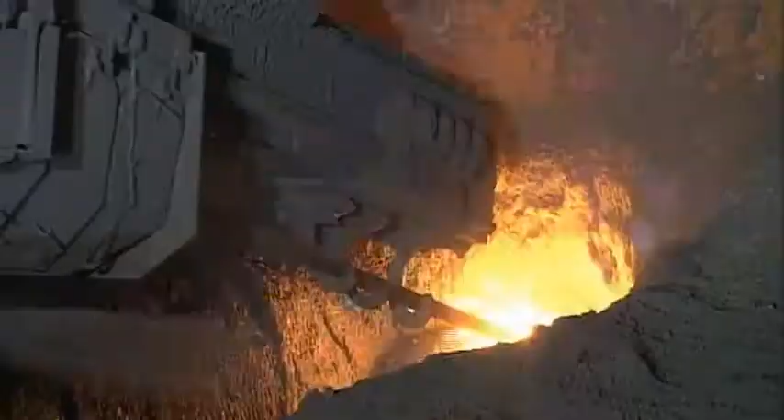JFE Group is one of the leading business groups in Japan, whose activities range from steel manufacturing to shipbuilding and to engineering and construction of industrial plants. JFE Group has 54,000 employees and 230 group companies. Its annual sales volume amounts to 32 billion euros.

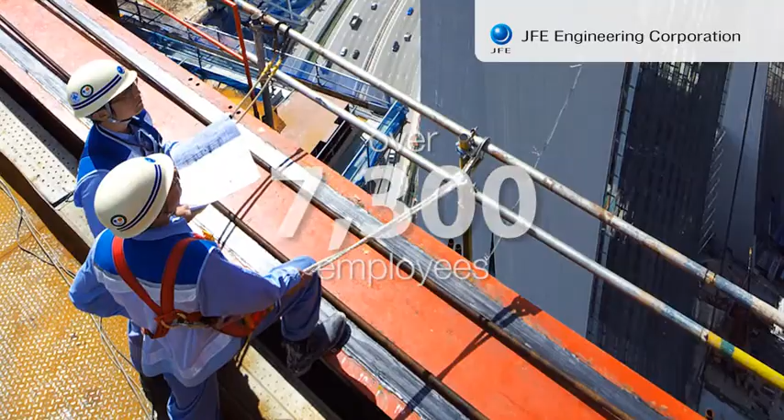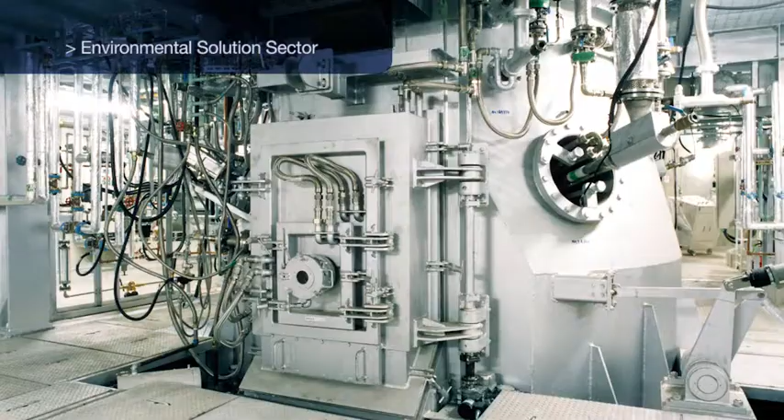JFE Engineering, with its 7,300 employees and sales of over 2.7 billion euros, is one of the main activities of the JFE Group. It operates through specific divisions in these fields: environmental solution, recycling, energy industries, steel structures, industrial machinery, and research.

Its engineering capability, extensive operational experiences, and a clear recognition of the changes in our society give the company a foresighted vision of the future.

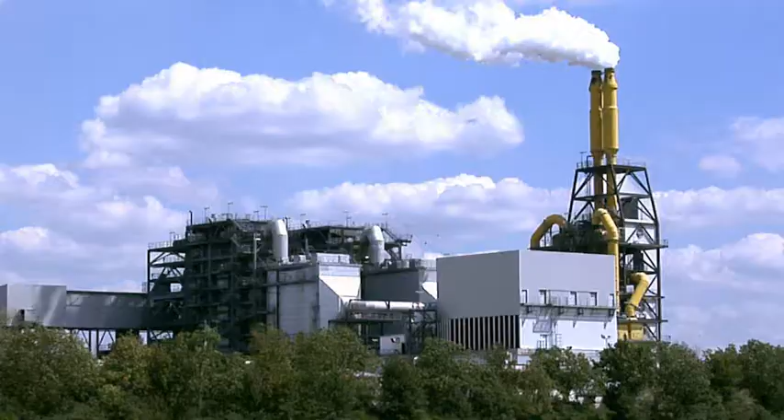JFE Engineering gives priority to combining its corporate growth with respect for the environment. Japan, as a densely populated country, has had to focus on environmental protection, which includes resolving waste disposal problems. Within this framework, JFE Engineering has been working for over 40 years to change waste into resource. From 1968 to the present day, JFE Engineering has designed and built over 150 thermal treatment plants, becoming one of the leading companies in the industry and contributing to Japan's success in its waste management strategy.

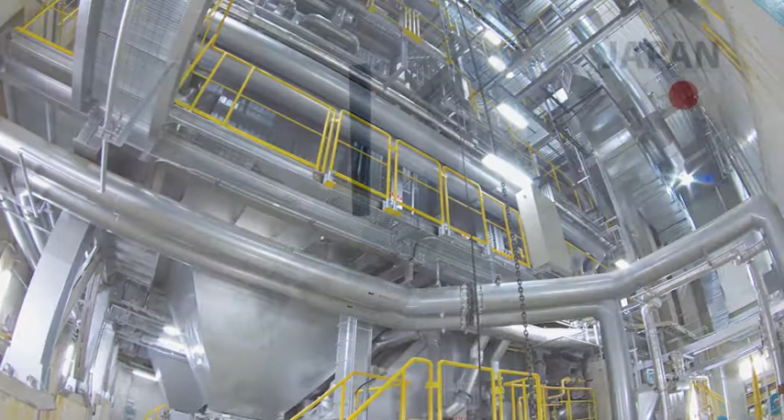Applying the technology, Japan has succeeded in drastic reduction in landfills, where now only 2% of the total waste is being directly landfilled. The growing awareness of environmental protection leads to the suppression of landfills and of the problems related to this kind of waste treatment.

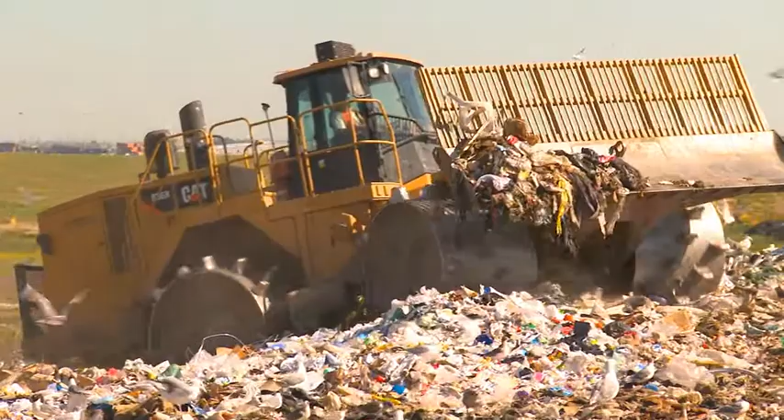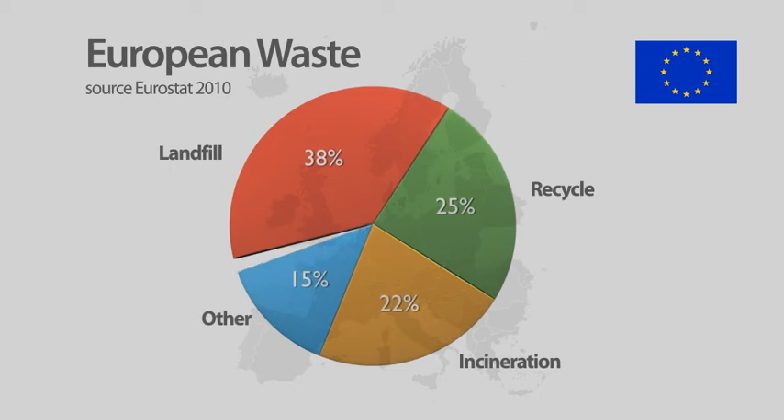In order to put an end to the era of landfills, the European Union has adopted a waste management strategy based on recycling and recovery. Nowadays in the European Union, about 40% of municipal waste is being landfilled without treatment. The waste that cannot be recycled should be changed to energy or other valuable products through dependable thermal treatment technologies.

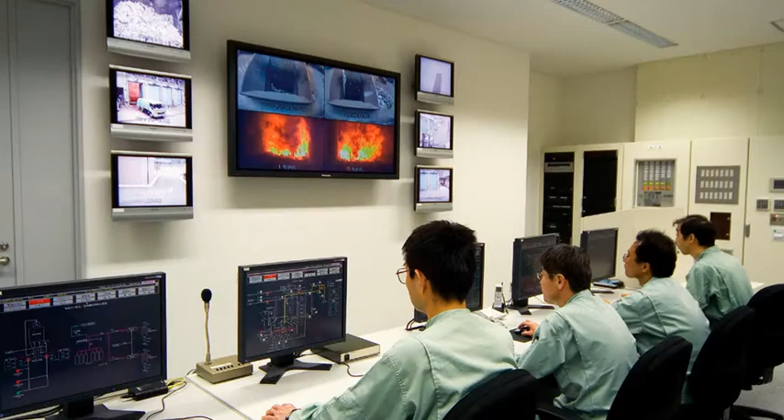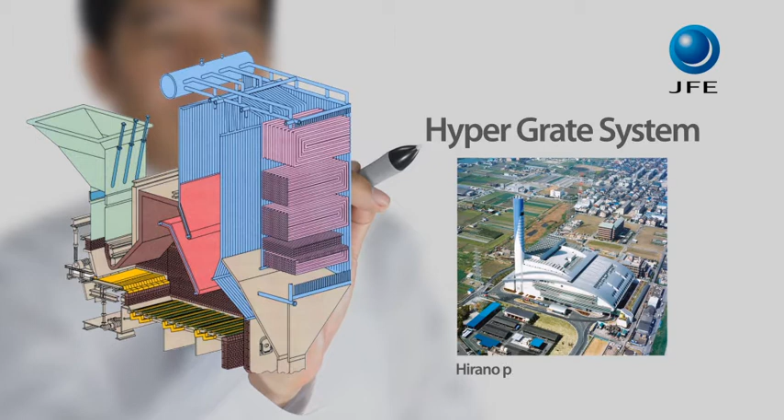This is the reason why, for over 40 years, JFE Engineering has developed a variety of plant solutions for waste thermal treatment. It is now able to provide all the conventional technologies in their most advanced versions. For example, the Hyper Grate System, a cutting-edge development of the grate system that makes it possible to obtain the best performance ever with this type of process.

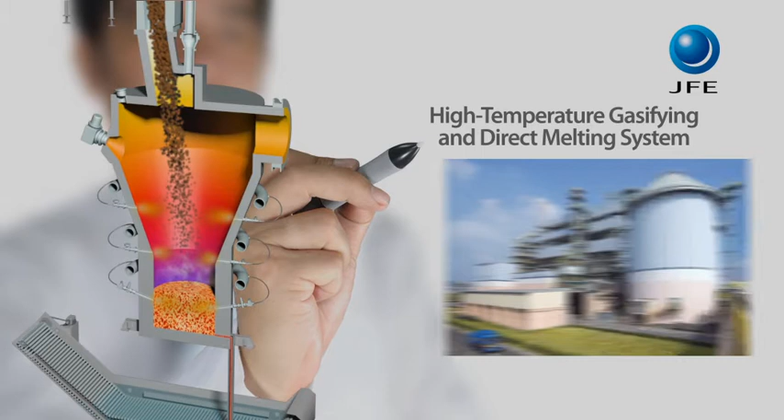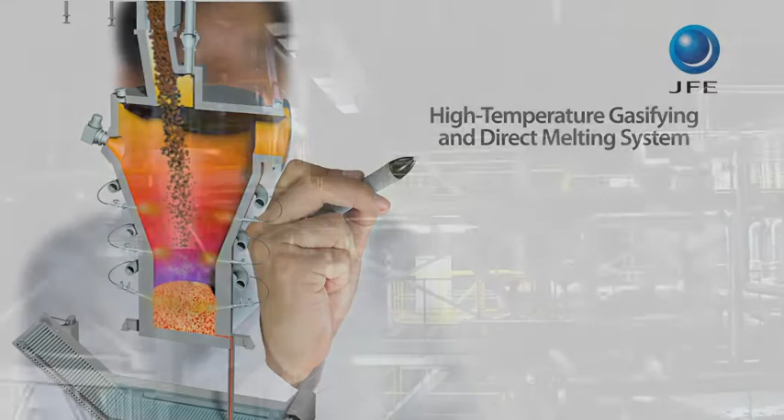The growing demand for environmental sustainability has led and will lead us to adopt increasingly strict regulations and social acceptance criteria. With this in mind, JFE has created its most advanced solution based on the gasifying process, high-temperature gasifying and direct melting system. This combines the superior environmental protection performance characteristic of the gasifying process with high energy efficiency and top-level reliability.

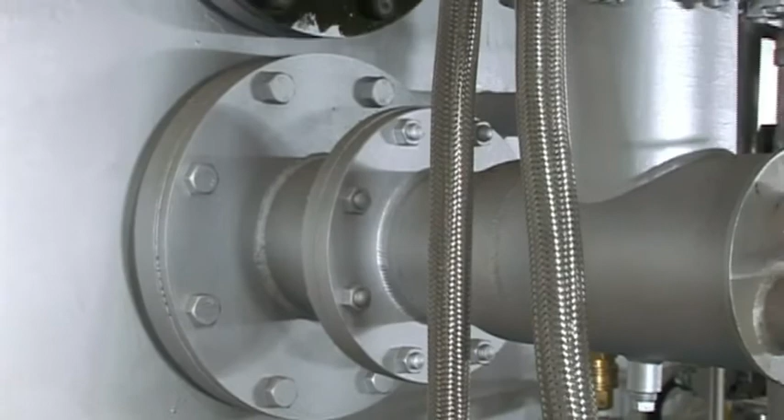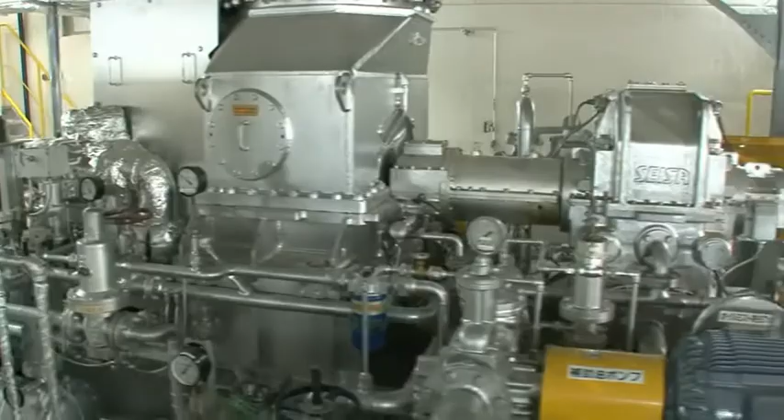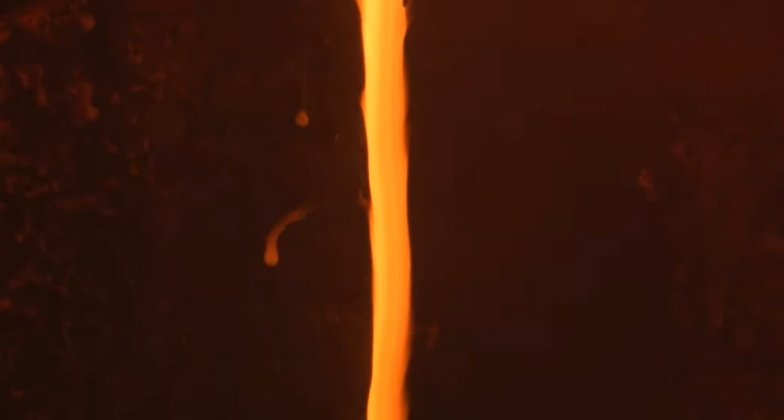The main feature of the process is indirect combustion through gasification of waste. Waste is no longer directly burnt, as is the case for conventional plants, but it is converted into gas. The gas generated is used to produce electrical and thermal energy through an efficient and controlled gas combustion process. By using this technology, it is also possible to recover incombustibles of waste as inert slag and metal, which are recycled in Japan for civil works and industrial purposes. In this way, bottom ash is no longer produced. The furnace is one of the key components of the system.

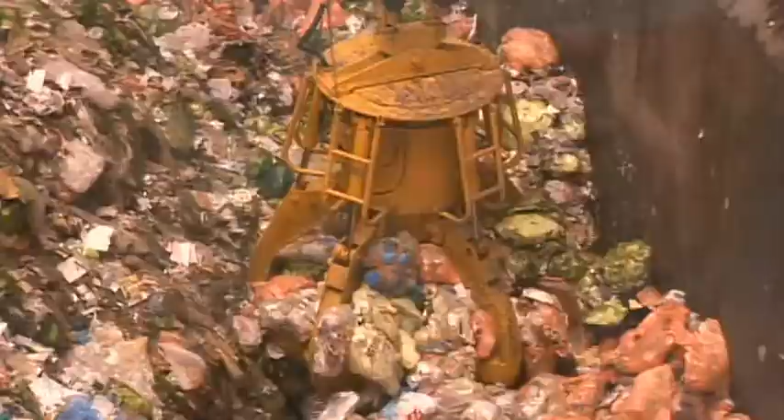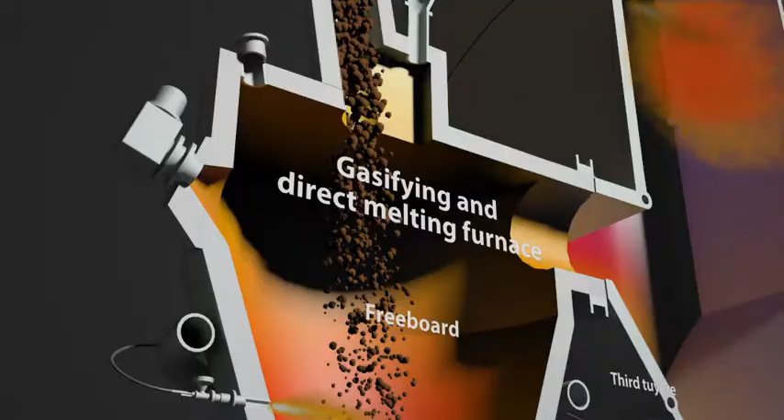Waste coming from the storage pit is fed into the furnace. In the gasifying layer inside the furnace, the waste that is placed into the furnace is converted to gas. This happens at 550 to 650 degrees Celsius by means of a controlled air supply through a secondary tuyere.

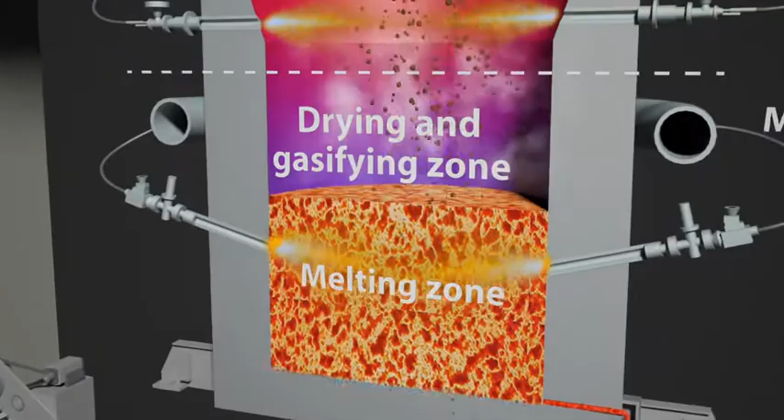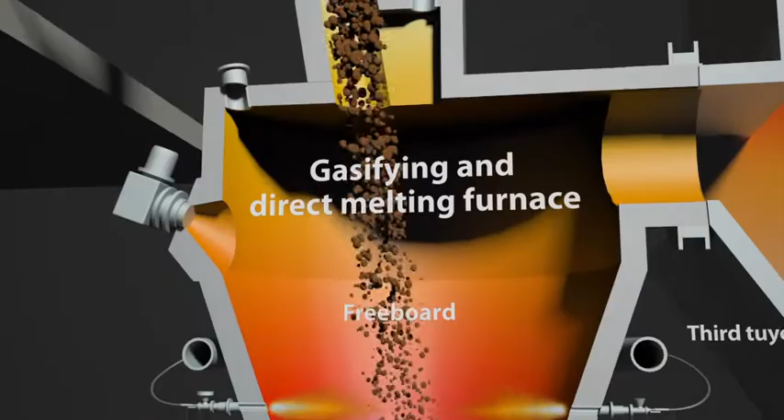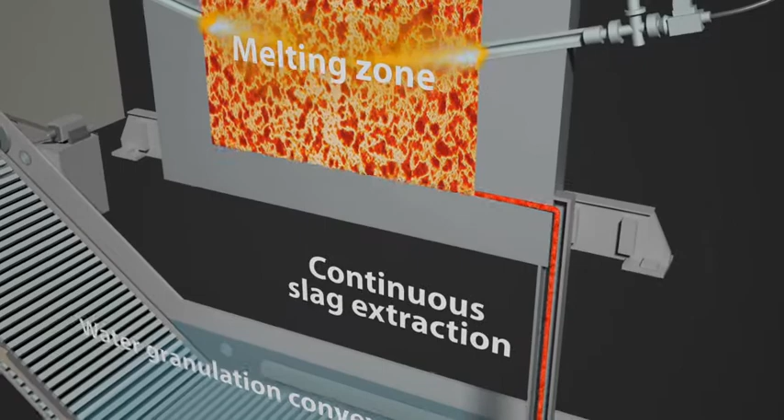Incombustible fraction of waste goes down to the melting layer, where a temperature around 1600 degrees Celsius makes melting possible. This high temperature is achieved with the combustion of carbon having the same function as in a blast furnace for steel making, and the controlled injection of oxygen-enriched air through the main tuyere. The melted incombustibles are extracted continuously and brought back to its solid state in a granular form, making it possible to separate metal from slag.

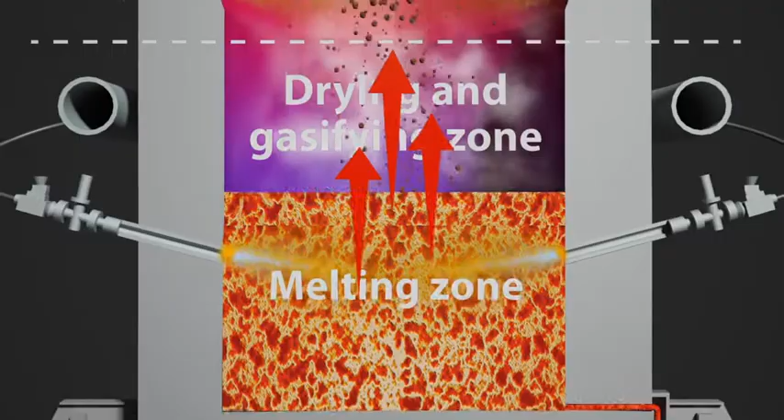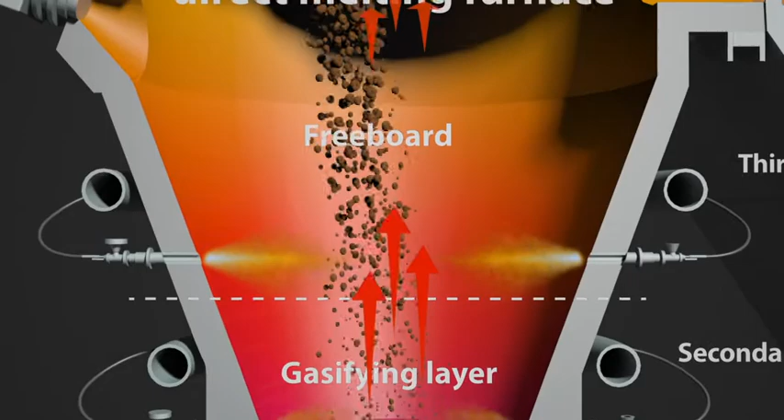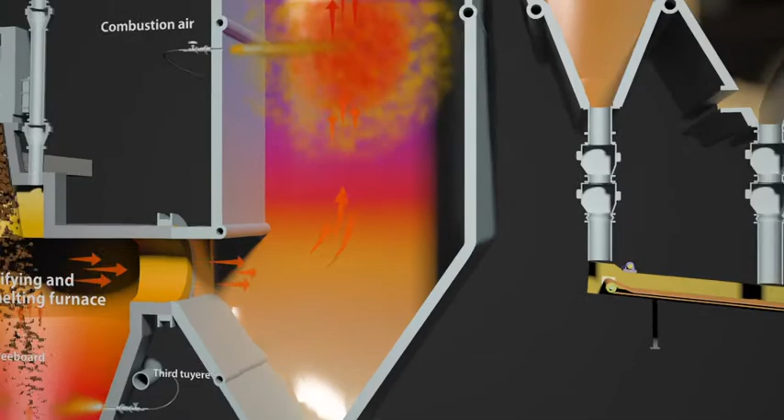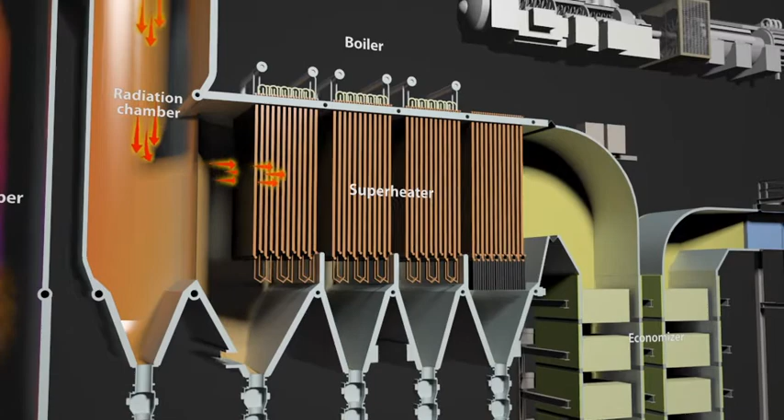The gas generated from waste goes up to the freeboard where it completes its conversion process. The generation of hazardous substances is prevented by the reducing atmosphere at a temperature of 850 to 950 degrees Celsius. The gas obtained from waste is combusted in the secondary combustion chamber. The heat produces high pressure and high temperature steam in a boiler. The steam generates electric power through a high efficiency steam cycle or can be used for district heating or other industrial applications.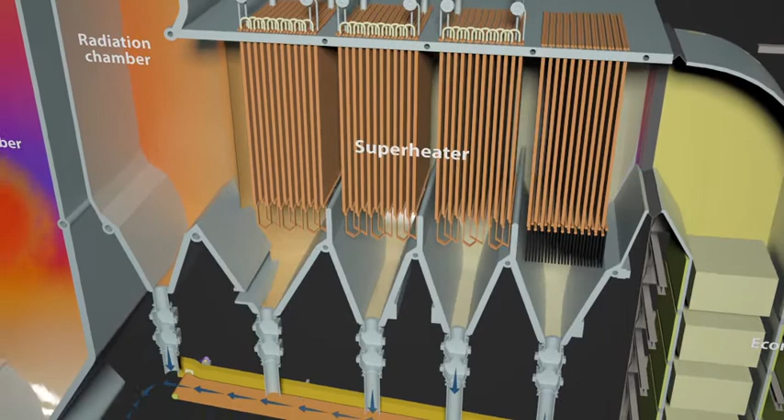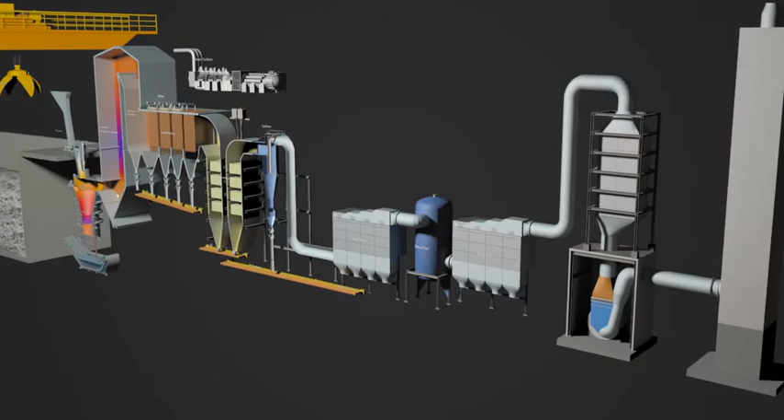To further increase the environmental performance of the plant, the residual ashes can be collected and returned to the furnace where they can be thermally treated. After passing through a conventional flue gas treatment system, the flue gas is constantly monitored and sampled for close verification and to record its composition. Finally, the gas is released into the atmosphere.

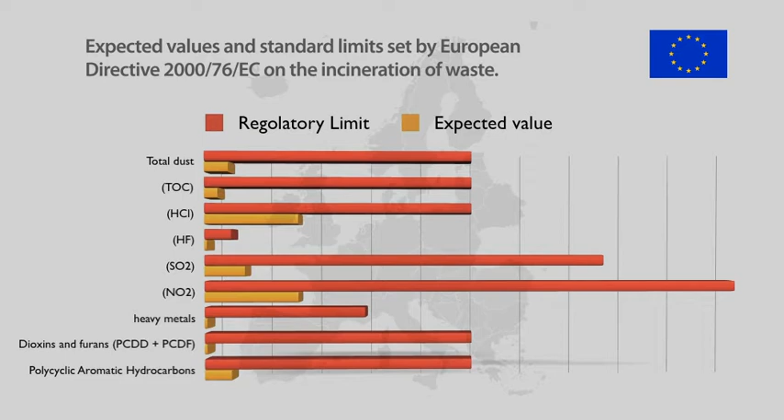The officially certified record in Japan shows an emission level quite lower than the regulations. Especially, the concentration of dioxins is 1,000 times lower than the regulations in Europe.

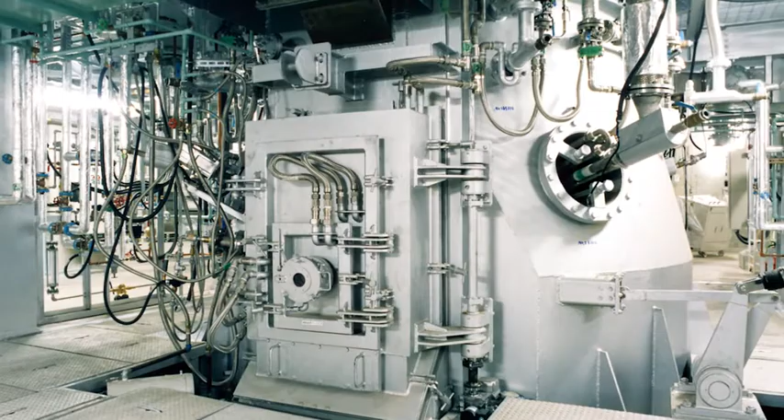The gasifying and direct melting system is the solution for solving problems associated with waste treatment in our modern society. High efficiency in power generation: an efficiency of 30% was realised in Japan.

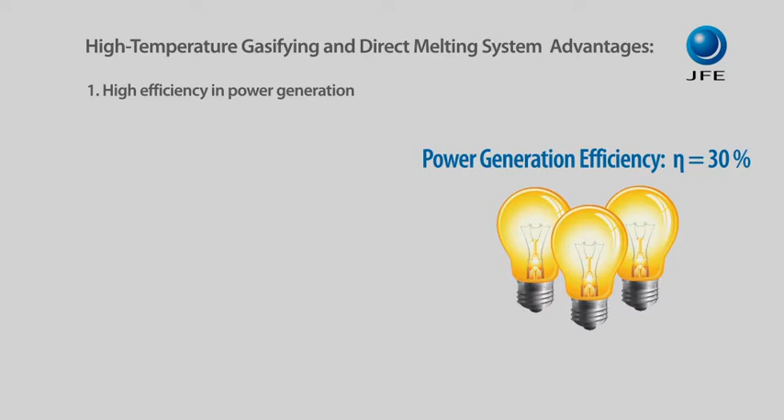Very low environmental impact. The system prevents formation of dioxins with high temperature freeboard under the reduction atmosphere. All the plants built by JFE have been achieving much lower dioxin emission levels than the regulations.

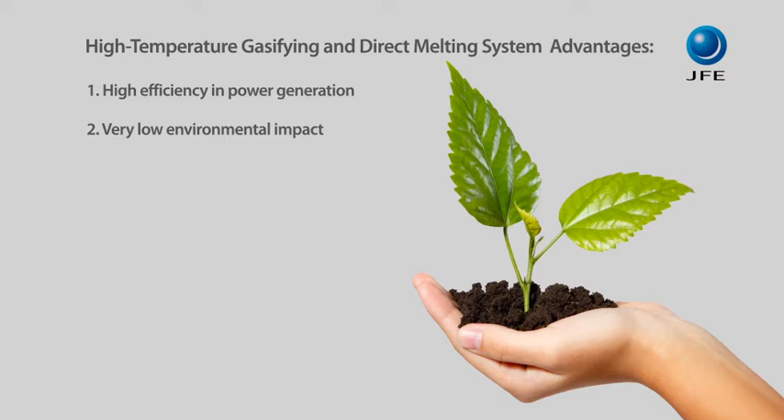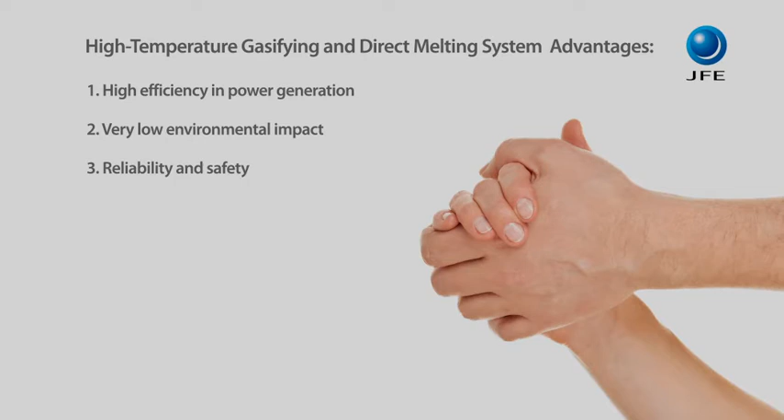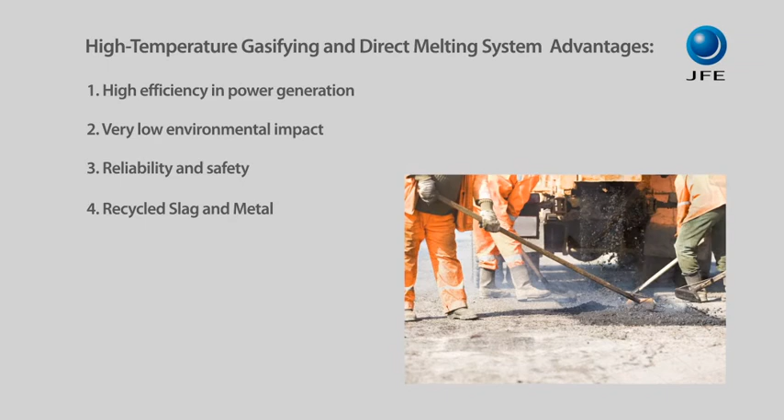Reliability and safety. Plant reliability and safety are proven through the track records of more than 10 plants since 2003. Recycled slag and metal: slag and metals are being used in Japan for civil works and industrial purposes, such as backfilling, road materials, paving blocks, etc.

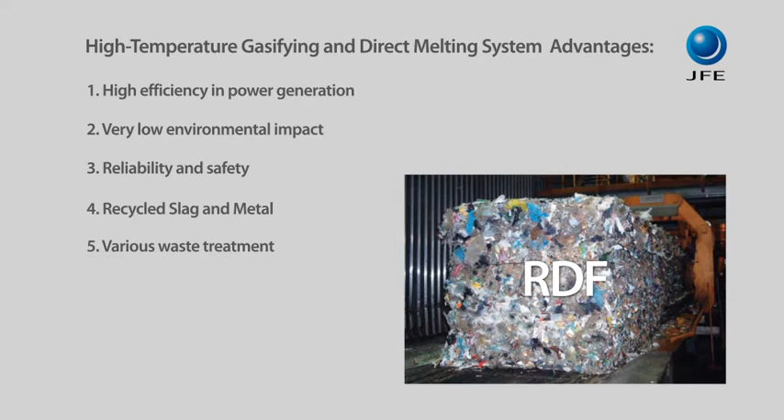Various waste treatment: a large variety of wastes can be treated, either pre-treated or not, including sewage sludge, automobile shredder residue, hazardous waste, and even landfill waste. Variety of plant capacity: plant capacities from 1 to 13 tons per hour are available.

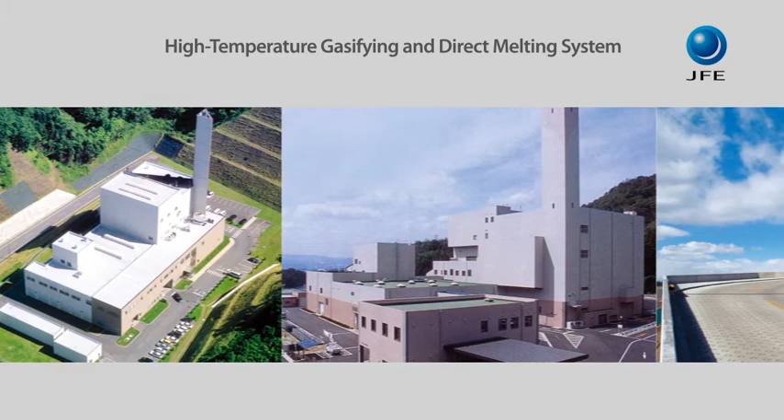JFE's gasifying and direct melting system is a proven gasification technology that is highly appreciated by clients because of the smooth and efficient operation of the plants that have been working for many years.

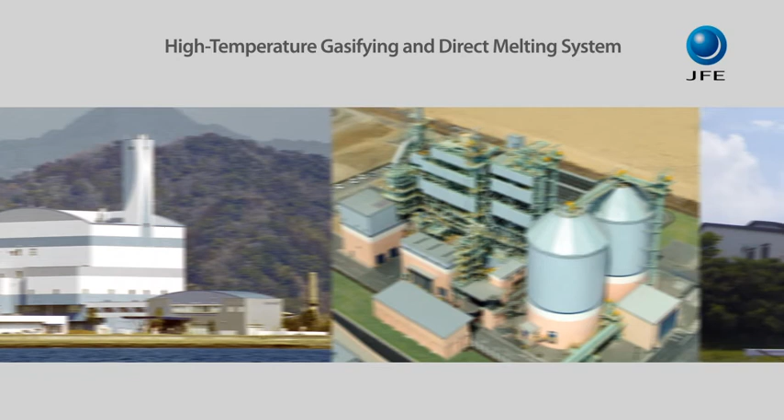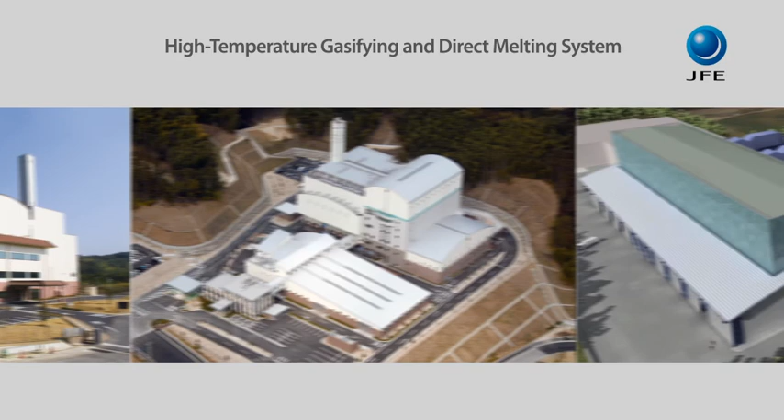JFE Engineering uses sophisticated engineering combined with vast experience to design and construct environmentally friendly plants for the future.